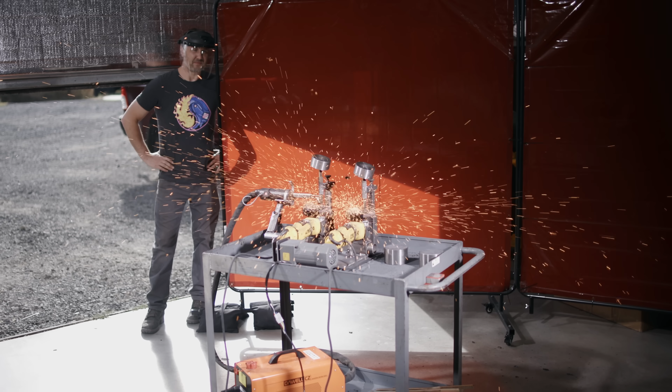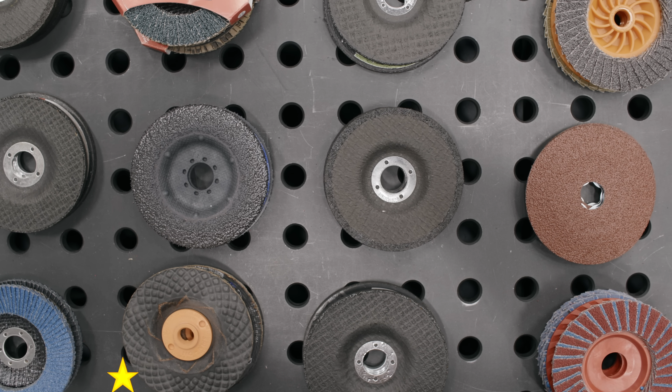This is my disc destroyer. It's a mean little machine with one job, testing grinding discs. With so many grinding discs and countless reviews, it's hard to separate fact from fiction. This is where the disc destroyer comes in. It cuts through the noise, delivering real results. No bias, no sponsorships, just cold hard tests.

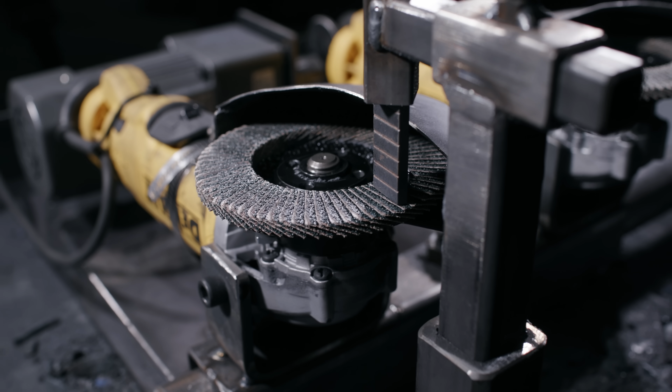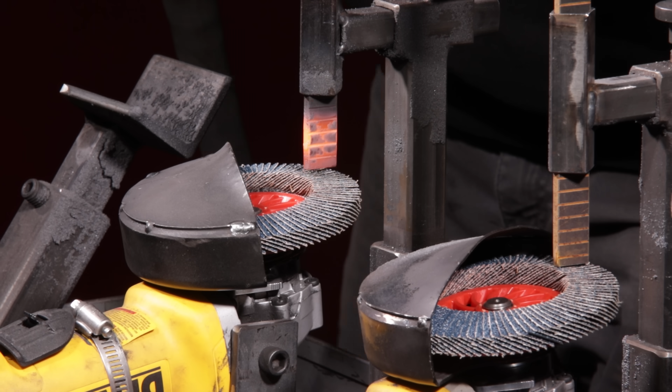Grinding discs can face a lot of real-world challenges, like high and low pressures, hot and cold materials, and of course, fast and slow speeds. This machine tests it all, so that we can finally find the truth in the reviews.

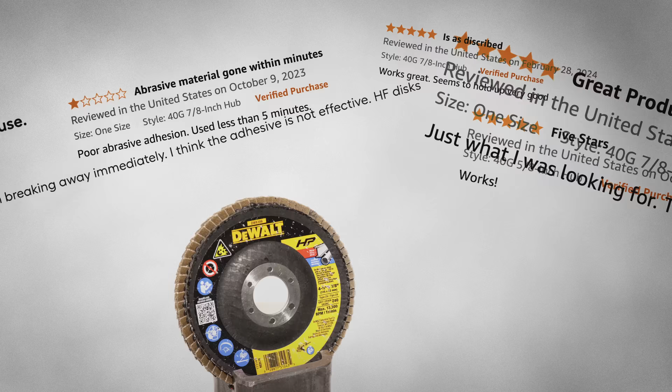Today, I'm testing the DeWalt High Performance Type 29 flap disc, coming in at $4.04. Some claim that it works great and that the price is worth it. But others say the adhesive is not effective, not even lasting 5 minutes. So, which reviews are true, and which ones are shit? Let's test them to find out.

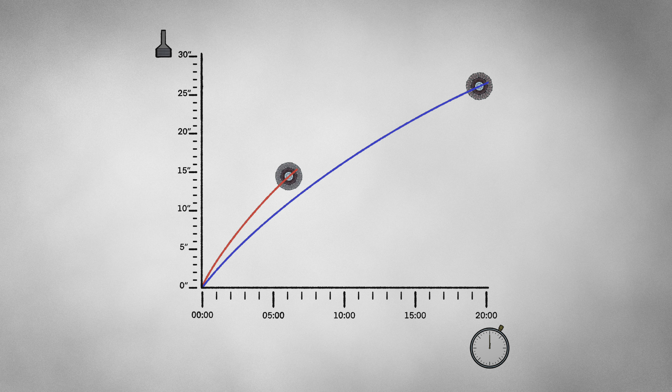Let me break this down for you. Each disc will be grinding this test bar to see how much it can remove within 20 minutes time. This will chart out its story, and tell us exactly how this disc behaves based on how much material it removes at any given point. But if the disc stops effectively grinding the bar, or just straight up disintegrates, the test is over.

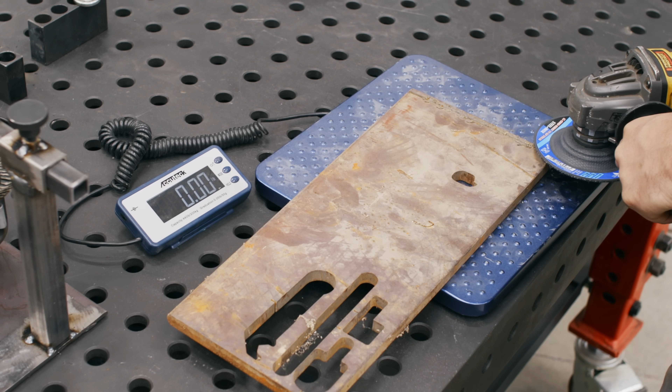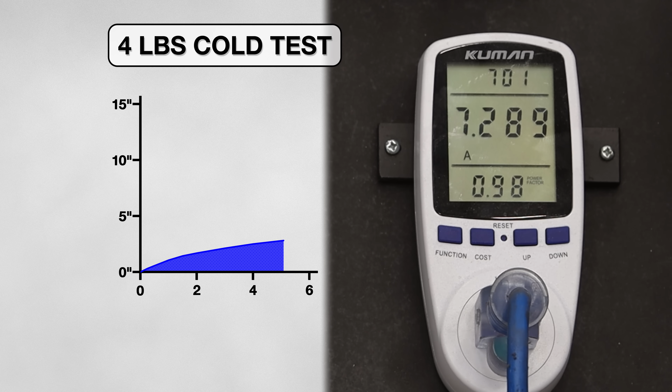Let's begin. I started by simulating light pressure grinding by using a 4-pound weight on my rig, and this approximately matches the weight of a grinder. When the test started, it removed material at a slow and steady rate, but it only ended up grinding 2 3/4 inches of my test material until the sparks stopped and amps dropped, telling me that this disc wasn't grinding effectively anymore, and this happened only after 5 minutes.

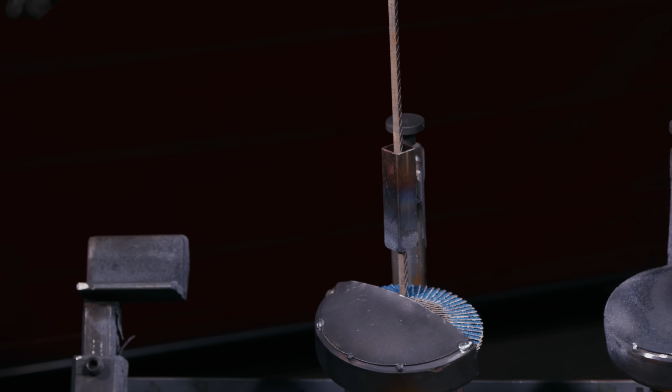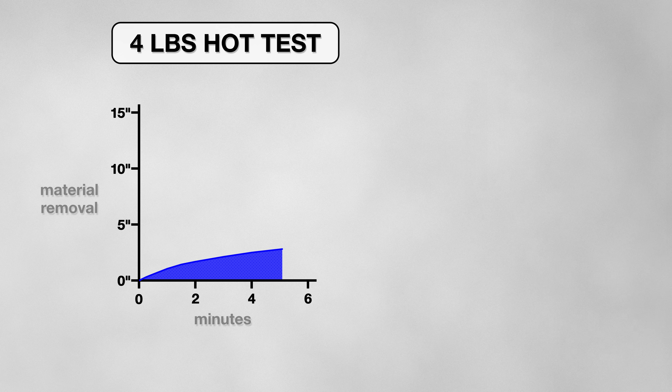These results looked suspiciously close to one of the reviews, so I altered a variable to see if it would change the outcome, and preheated only the first 2 inches of the test material to flash the disc with some heat. This simulates if someone grinds on a hot, fresh weld. After all, this would put the adhesive under more stress. But this disc's performance did not change, despite the heat. It just removed a little more material. And it was still lasting only 5 minutes. This review was starting to look true, but I knew there was something else I could change.

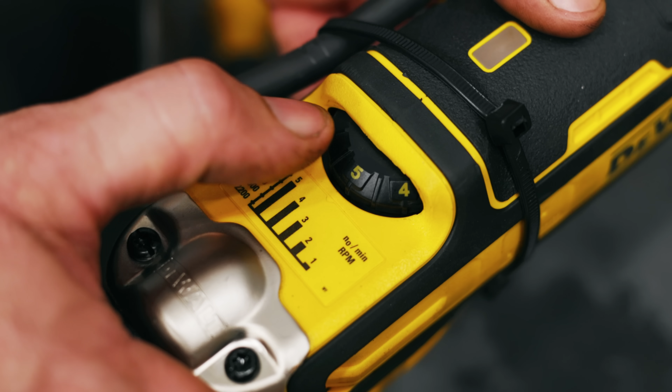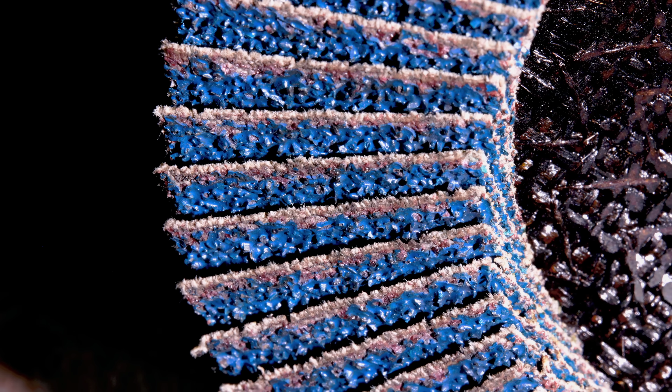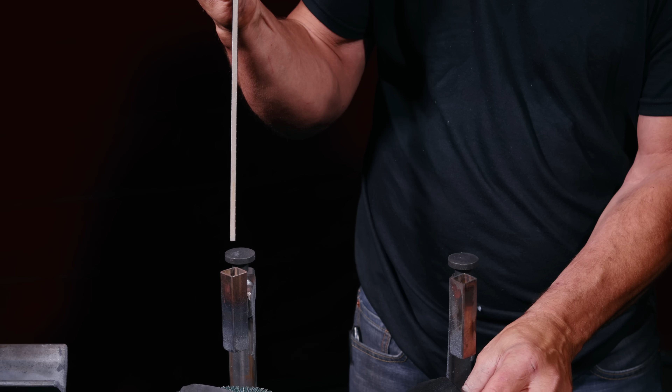So I shifted the grinder back to top speed and figured the best thing to do next was to change the weight of the pressure we would be applying to the grinder. I swapped out the 4-pound weight and increased it to 8. And when I started the test, I noticed how much steeper our curve was because this higher pressure was removing a lot more material. And it lasted more than 5 minutes. But we can see here that it flatlined, showing us that it lost all of its cutting efficiency by glazing. So why is this getting positive reviews?

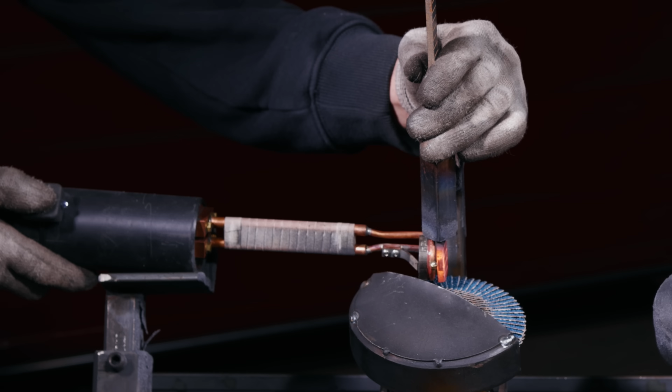The only test I had left to do was to add some heat with this 8-pound pressure, and hope that this disc could finally start performing well. And it did. This disc started grinding and grinding and grinding, and ended up lasting the entire test time, grinding off over 15 inches of material. What it looks like here is the hot metal gave the abrasive a soft start. Unlike the cold metal, which is going to be harder by comparison, and a lot more damaging to this abrasive.

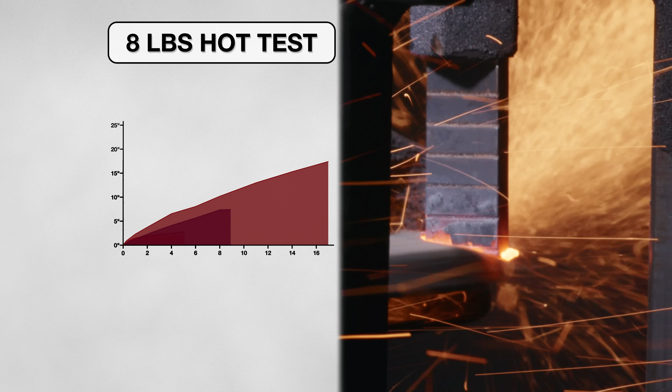Which leads us to this question: were these reviews true? Well, yeah, they do work great when applying the right amount of pressure. And for those that had adhesion problems or couldn't last long enough, I recommend pushing a little harder into your material to prevent glazing with this disc.